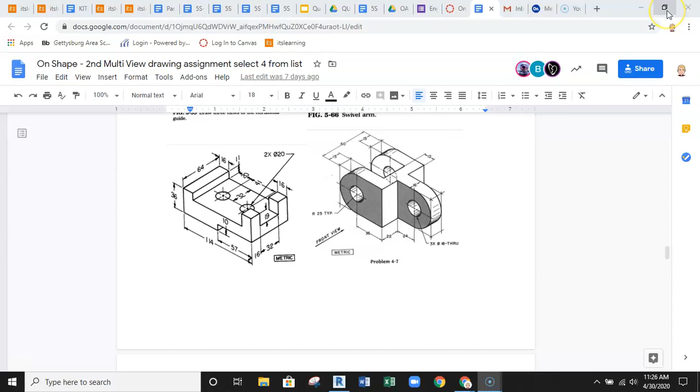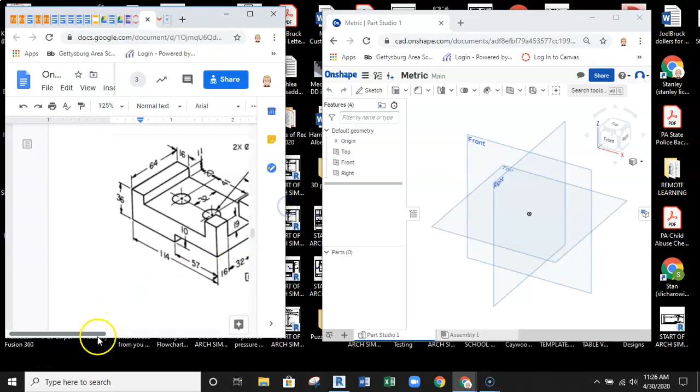Looking at this metric part in the assignment, I'm going to minimize this screen so I can see this part, and take my OnShape and drag this out so I can have two different browsers functioning at the same time. I'll zoom in here a little closer so I can see the dimensions better, and try to start drawing with OnShape, working from a metric drawing file. We're going to keep manipulating my folders and windows a bit, just so I can see as much as I can in the drawing space.

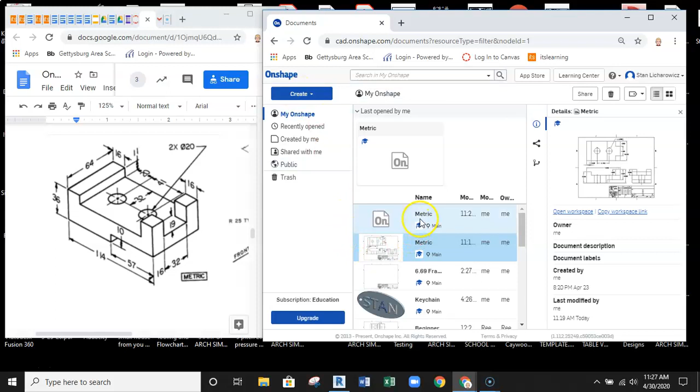Okay, so I already started a new file, and that's done. Of course, I'll be going from OnShape and hitting Create. I'm going to go back to that file here, and I named it metric.

So with that being set up, I need to set up the units that I'm going to be working with. I'm going to pull down these three little lines next to the word OnShape, come down to workspace units, select that, and when it says default length unit, pull down, and there's my millimeter. I'll select that, and it says millimeter. I'm going to keep the decimals the way they're set up, as far as decimal displays and the like, so hit the green check.

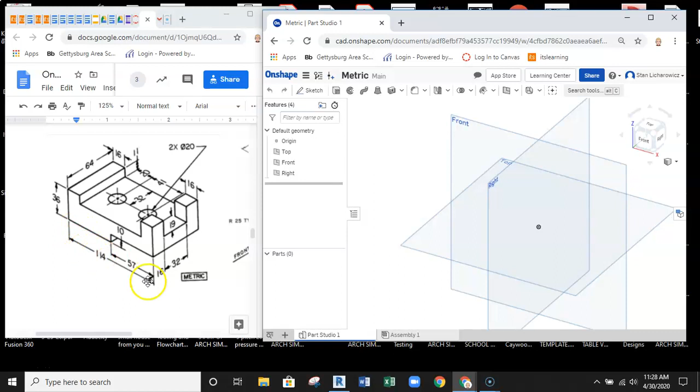So now I'm ready to draw. Looking at the object, we got 114 and 57, 10 up, 36. I'm going to go ahead and create this front profile, then extrude this part out.

I'll grab my sketch tool, grab my front view, and hit the front on the cube so I can rotate that. Now I'll grab my line tool, and just starting from that point, we'll pull out and drop a line. I'm going to zoom in on this a little bit and then hit the green check.

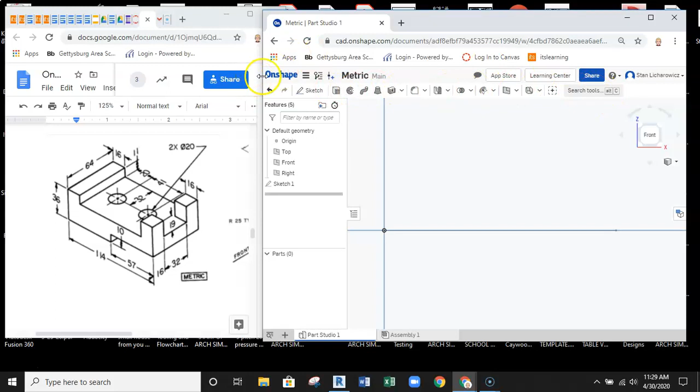Now I'm going to find my dimension tool, which seems to be hiding. I've got to pull my window here a little more so I can see more of my tools. I'm in model space, so I've got to get back into my sketch view. Now I'm in my sketch view.

There's my dimension tool, and I'm going to just dimension this line, and put in that 114 millimeters. Now I have a 114 millimeter line.

Just continuing to draw here, I'll go from this point up and drop the line in position. One thing I found as I keep working with this product is I just want to start sketching more and then come back to create the dimensions and put them in position. Whereas with Inventor, as I was drawing, I was adding more dimensional constraints as I worked. So just a little different way to do this.

So what I'm going to do is keep adding and come work around on this side a bit more. Given 114, well, looking over here at the drawing, 114, and I have 57. So 114 minus 57 is... I'm going to change this dimension, and make this 57.

Then I'm going to take my new line, and come up and sketch over this distance at some point, then drop this in here, grab my line tool or dimension tool, and continue to dimension out these lines. As I keep dimensioning, the part starts to take shape as it needs to. So I just keep sketching in the overall object shape that I need here, and adding dimensions.

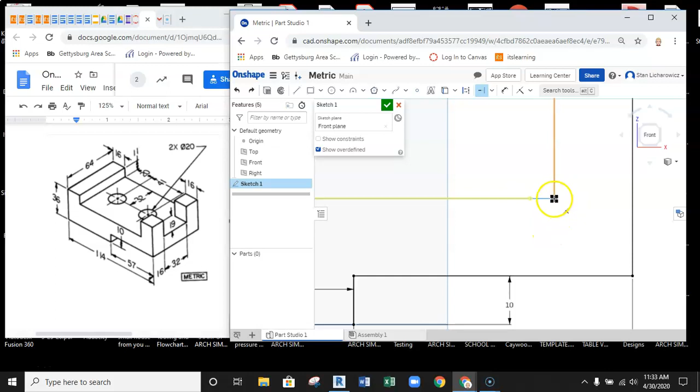So what I'm going to do is utilize my, let's see, I need to find where my extend tool is. There's my extend tool. I'm going to zoom in here and select the line and select the point it's going to extend to. And then I don't like to have random points hanging out in my drawing, so I'm going to get rid of that.

So I just keep continuing here with some dimensions. I need to do an 11 here. Drop this into place. And then it looks like the last thing I need to do is make this the correct height. This is going to be 19.

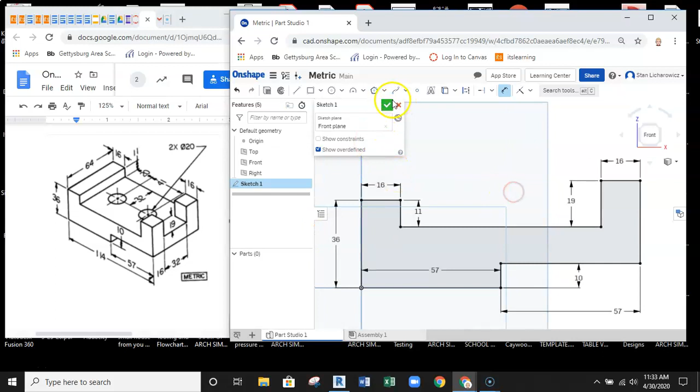Now it looks like I'm ready to do my first extrusion. So I'll finish my sketch, and rotate this view a little with my right mouse. Now I'm ready to use my extrude tool. So I select the extrude tool, select the profile, and my overall extrusion here is 64.

So we'll go ahead and put in 64 and hit enter. There is my extrusion, so I can go ahead and finish that. Now, next thing I'm ready to do is start working out some negative extrusion.

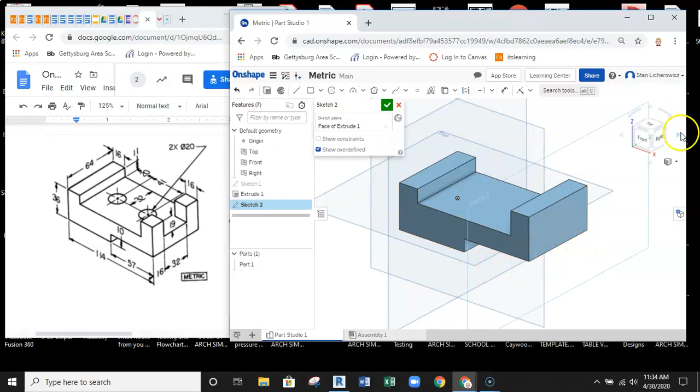So I'll grab my sketch tool and place it on this face. Go ahead and turn the view so I can see what I'm working with. Okay, so I'm going to grab my line tool, and I'm going to turn this into a construction line because I want to have a center line down here. I'm going to go from midpoint to midpoint, hit escape to finish the command. Now, I want to make sure that's turned off.

I'm now going to grab my corner rectangle, and I'm just going to sketch this rectangle in here quickly. I'm not centering this thing or anything like that yet. I'm now going to grab my dimension tool, and I'm going to dimension the height of this, which is going to be 19. And I'm going to do the same thing and dimension the length, which is going to be 32.

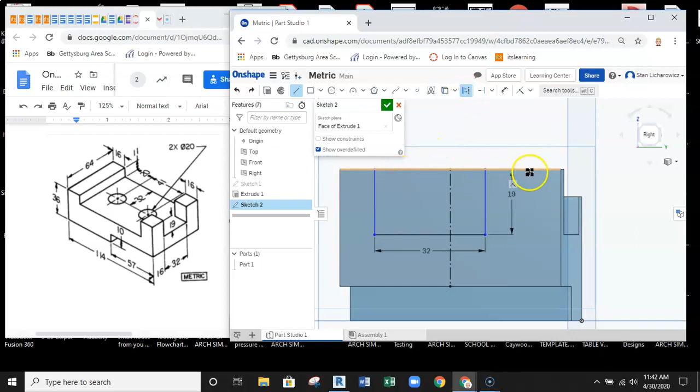All right, so now what I want to do is set this up so that the rectangle is moved over to center. I do this so that I can keep this locked onto center. So what I'm going to do is grab my line tool again, grab a construction line, find center of the rectangle, not center of the part, but center of the rectangle, come down and draw a line across that. And then I'm going to pull down my constraints. I'm going to grab this coincident constraint. I'm going to grab the line I just drew for center, and I'm going to select the center line of the part face.

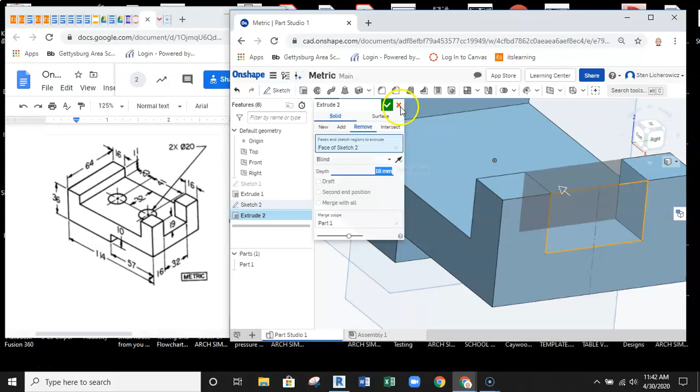Moves the whole rectangle over. Now I know this is the center of the part, and I can finish and go ahead and extrude my part. Alright, so now I'm going to turn this a little bit, grab my extrude tool, select the extrude in area, and instead of adding, I'm going to remove. Now, I can go 25 millimeters here, I can take this to 16. It's not going to make a whole lot of difference either way that I do this, because it's going to remove all that material. So with that, we're good, and we have a negative extrusion.

Now ready to start the holes and where they're going to end up. So to do that, I'm going to grab my sketch tool, drop it on the face, again turn and look at it from the top view, and now I'm going to set up a construction line to locate center of my part. That's going to be step one. Now I want to start positioning some holes.

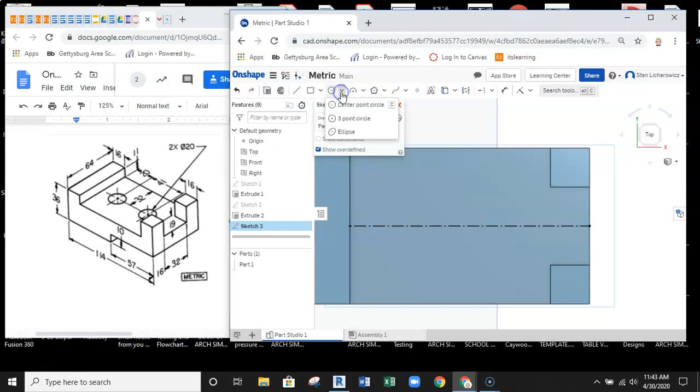So I'm looking at this, these are both going to be 20 millimeters, so I'll grab my circle tool, grab my center point circle, and I just want it to be locked onto that line, and then drop these in position. Now I'll go ahead and set the size. That's going to be 20, enter, and then do the same thing here. Pull that up and then do 20 and enter. So now they're the same size.

Now I just need to position them. So I'll grab my dimension tool. I'm going to go from the face to the center. Sorry, clicking a few things too quickly. I grabbed the wrong tool. Need to grab the dimension tool. Go from the edge here to the center of the circle. Pull that up, and then type in 20. That moves the circle to position.

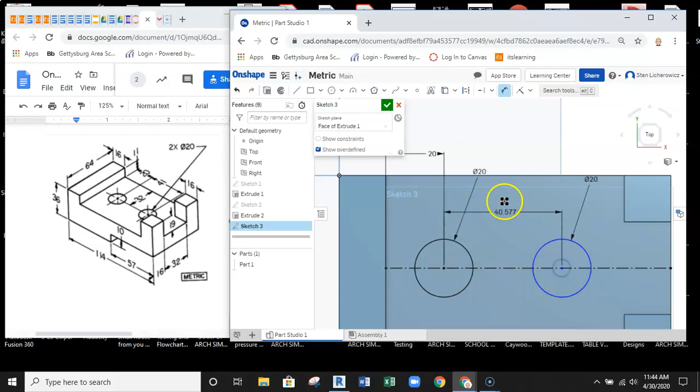Next one I have to do, make sure I grab the dimension tool this time. Center point to center point, come up. Do this again, let's do center point to center point. There we go. Come up, drop that in position, and that is 41. And that moves into position.

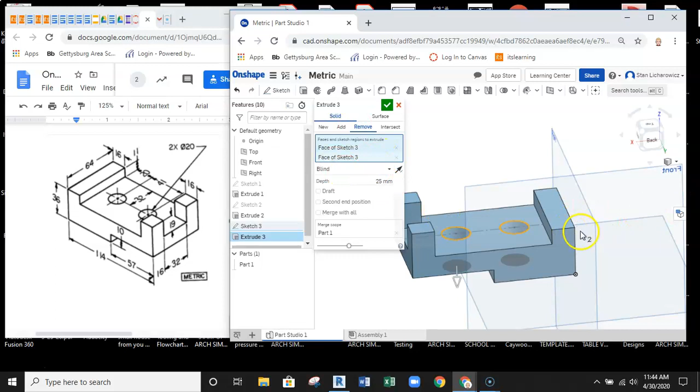So now it looks like I'm ready to do an extrusion again. Again, rotate my part around so I can see what's happening here in 3D. Grab my extrude tool, select both of these objects, tell it to remove by flipping them around, spin this around, make sure I'm going through the entire part both ways. Now it says here that the part, yeah, it looks like I'm going through both parts. Yep. And then go ahead and hit the green check and verify I have holes, and there's my metric part.

So now I'm ready to go ahead and start laying out this metric part.